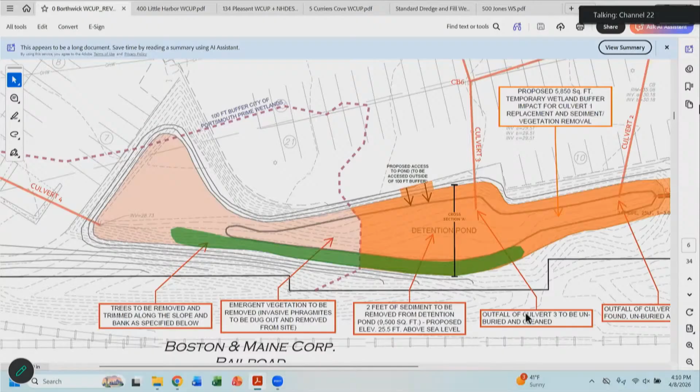The area in green is where the pond has been maintained to some degree on the parking lot side, but that green area has some trees that have grown up on the slopes. Generally, you don't like to see that on the slopes of a pond. So we've gone through that green area and identified trees. A fair amount of them are in pretty poor condition, dying, like the quaking aspen, and they're just dropping into the pond. So we want to be preventative and go through.

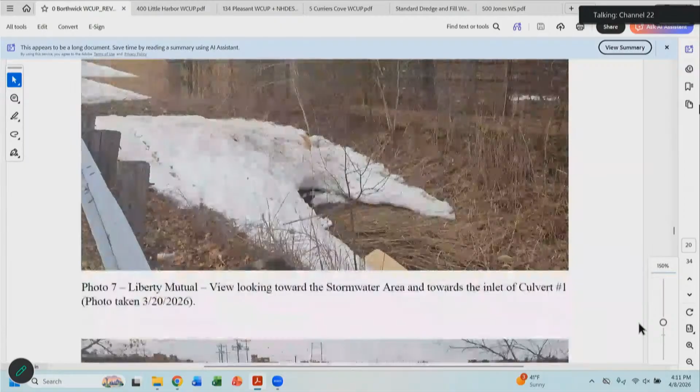Those are some good photos, that's the inlet area. That one's good too, it shows the trees well. They're not very mature, but they're several years old, maybe 10 to 15 years for some of them. So we're proposing to cut a few of those trees out to clear up that area, where the stormwater area narrows down in that photo.

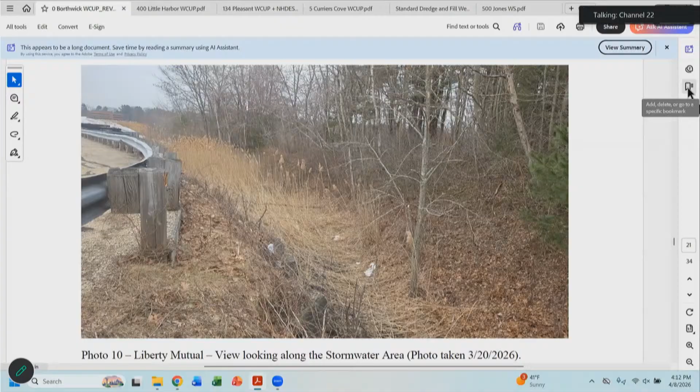We've come up with a list of those trees that we've provided, I think it's 11 trees we're proposing to cut as part of this maintenance of the stormwater area. DES typically recommends removing trees along stormwater areas. The list is on the bottom there for everyone to see.

We've got 3 red maples, 2 white pines, and the quaking aspens, which are a successional species that come in adjacent to water bodies. Those probably don't root very well on a slope and are falling down and dying at this point, so we're proposing those be removed as part of this project. That's mainly the majority of it.

We did update our impact areas, so some of the area is outside the 100-foot buffer. It's hard to tell what color the dashed line is, but the purple is the 100-foot buffer line. Right there, that other area is outside the 100.

But we're still working to get a contractor to do the work, so we'll develop a scope based on the approvals. Access will be down one of the slopes, we have a couple of areas to figure out how they'll get into the pond. That's the majority of it.

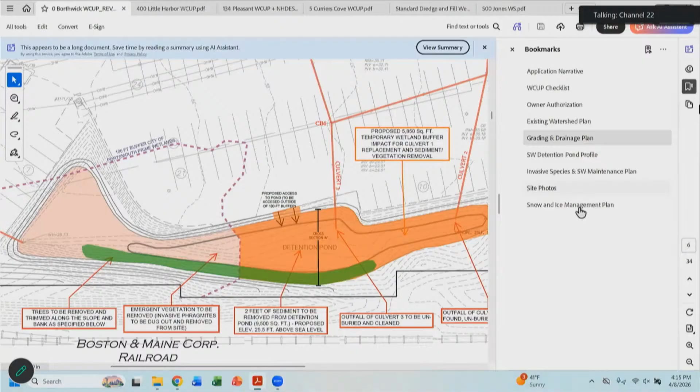Liberty Mutual prepared a snow and ice management plan, and this is their standard protocol on snow and ice. If there are any questions or concerns on this, we can bring it to Liberty Mutual to address any of the items on that plan.

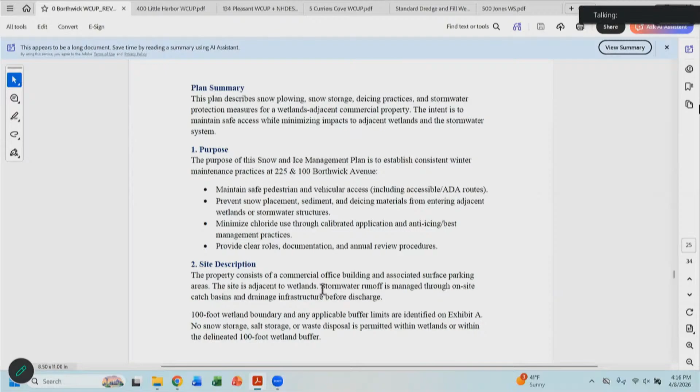So those are the main items. I know the commission wanted certainly the snow and ice management plan, invasive species, and then we have more of a stormwater management plan. So those are the main items that we think we needed to address from last meeting. So if there's any questions, we'll certainly answer those.

Great, yeah, thank you. Go ahead, Jess. Just on the monitoring plan, I understand that you will be out there annually to check, but will the applicant do any additional monitoring just to clear debris within that year time frame?

Certainly we could check on that. I think that would make sense. And certainly we could check with Liberty Mutual on that. I know they have contractors that are responsible. I'm just not 100% sure, so we can certainly check on that. Okay, I think that would be a recommendation I would have. It seems smart to kind of get ahead of it before it becomes an issue. Sure, yep, understood.

I have a question. With the 11 trees that are being cut, is there any opportunity on the property to plant in kind, or 11 trees of a better, whatever species would be appropriate?

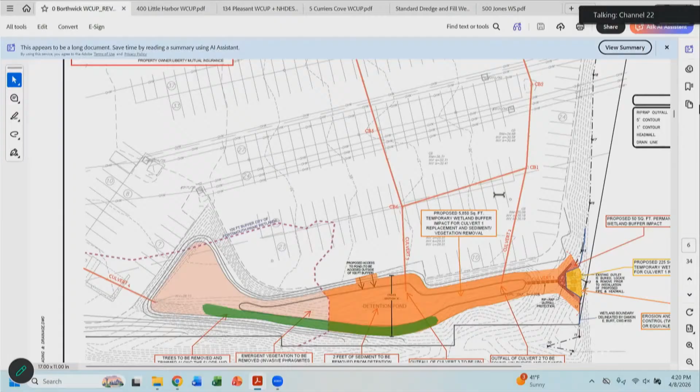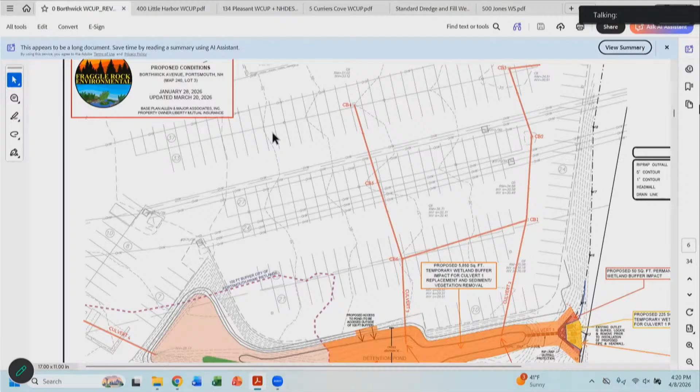But so I would think that there's opportunity to do some plantings. And if there is a tree restriction, we could certainly do some shrubs. I don't see why they would be opposed to that. That doesn't strike me as anything that would seem relatively minor in my perspective, but I would have to check with Liberty Mutual, but I don't think it would be an issue.

Certainly replacing the 11 with something similar, a shrub or tree, whatever's appropriate.

In the maintenance of the parking lot, they would just pick where it would make the most sense, since nothing's happened out there with regards to the parking lot yet. Right now you'll see they're storing some railroad stuff out there, railroad timbers. I don't really know the relationship of that or how it works, just an observation. The parking lot, in my mind, doesn't get a lot of use. I think it sort of looks like an overflow parking lot at this point, but the future may be something different that I'm unaware of right now.

So I think the plantings would make sense, and certainly we'll check on that for sure.

Just to reiterate, the plantings will also help with the stormwater situation too, since it'll help evaporate off some of that water. Correct. And I guess I was also curious, like this pond that's there, this detention pond...

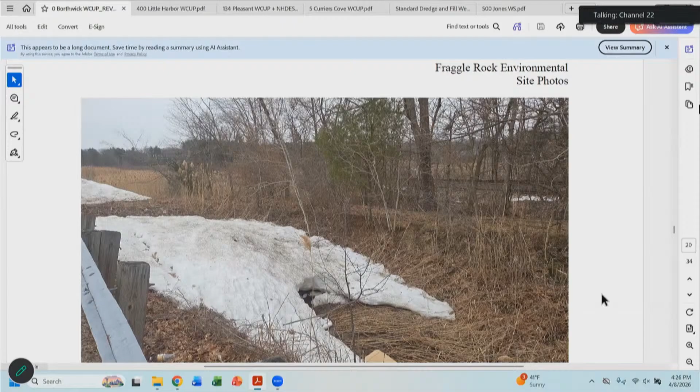The ones to the left really won't be cut, it's only a few on the actual slope. So we won't be on that slope part behind there, no. Maybe that pine right there might be cut, that one, but the bigger trees behind we're not touching at all. Those are really oaks, more developed, larger, almost 2-foot caliper. Those are basically quaking aspen on the slope we're looking at. It was hard to get a great photo, but those are into the slope. The better trees, like oak and well-established along that corridor, we won't be touching.

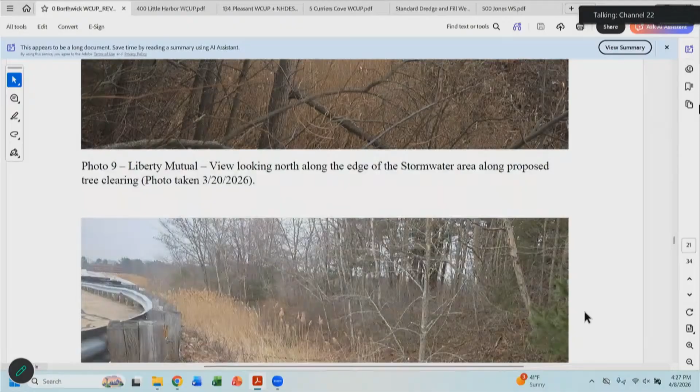I just had one other question. Last time I think you talked about salt storage there. Yes, on the snow and ice management plan it talks about how to do it, and I think there should be a figure that shows where it is. That's the salt storage, you see that in blue.

That's like that canopy area, and that's outside the buffer, even though it's close to the stormwater area. It's outside the 100-foot buffer. That's what they're currently using it as. I was just wondering if that's what they were doing now too. That is what they're doing, yeah. And where the red is, I don't know why you can't see in that building, there's like a storage office building, kind of their management or maintenance headquarters maybe, or something. I'm not sure, but the equipment's in that area.

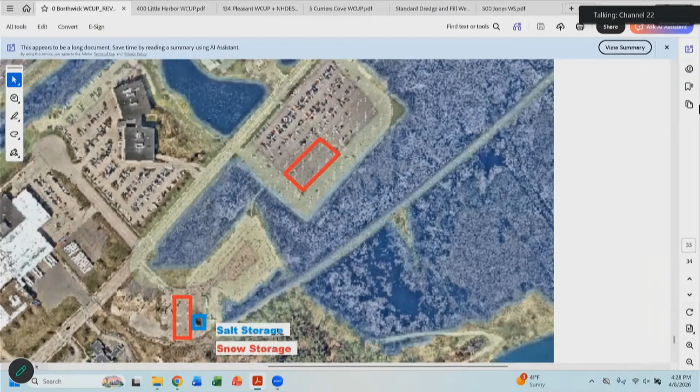That's kind of a funny photo, to be honest, for them to use, because it's a little deceiving, that photo or the image they used. But they've put it as far away on that parking lot as they can, relatively, outside the buffer, even though it's close to the stormwater area. Yeah, they have good BMPs anyway. They should be following the BMPs, and they have record keeping on the salts, when they did it, all that. We have not been involved in the winter monitoring, but that's something they're following in this plan.

Thank you, yeah, it's a good question. Any other questions? Are we ready for a motion?

Is there anything in the staff memo, Kate, that you need to address? I can't remember, good question. In the staff memo, I think last time we met we talked about getting a stamp on there. I think on the hard copy file that you delivered, you had the stamp. If we could just get a scanned version of that page, that would be perfect for our files.

It seems to be a thing with a lot of people, they'll do the hard copy stamp but the digital, you're like, oh, we'll get to that, and then you gotta scan it. It's a pain. Yeah, exactly, 100%. Just the one page would be great.

Sure, we'll do that. And we talked about trees. I think our second stipulation was a rollover from the first time we saw you, which came directly from the Department of Public Works. They wanted to see that maintenance plan and make sure they're committing to annual and long-term stuff. I think the first half of that stipulation doesn't really apply anymore because you provided a maintenance plan that looks at annual stuff. I think the second half is what we wanted to make sure gets included with this motion: that this maintenance plan shall be entered into the chain of title for the property in a recorded document approved by the planning and legal departments and recorded at the Rockingham County Registry of Deeds.

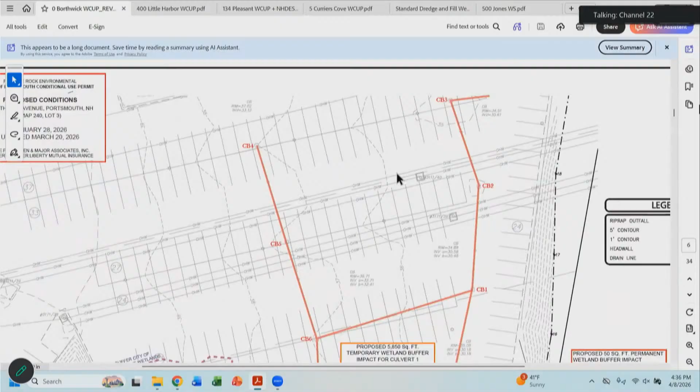Do you want the far side, like that top side boundaries? Do you mean like the prime wetland side, like this side? Yeah, well actually the top, because the wetland actually comes into the top, and I don't know if it shows 100% on that plan because it's sort of outside. The next plan above, I think, is the overview plan.

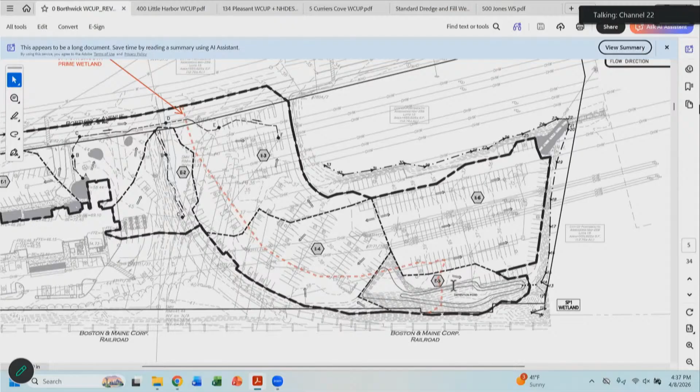Let's see. Yeah, so right up in that area too is the wetland - obviously comes on that side too. You want us just to focus on all the wetland lines that are basically shown on this plan? The northern - I think maybe just the area that you're going to be working in. Okay, and the guardrail that is right adjacent to that area.

Okay, yep, I just wanted to clarify while we're all here, 'cause I may be thinking later, what was I supposed to do? So, okay, no, that's fine. If everyone's okay with that - okay, are we ready for a vote?

I was just going to add one thing. It's not really as relevant in this case, but this project does seem to meet all of the criteria for approval, the 6 criteria. Good job, Barbara. Trying to remember. Great.

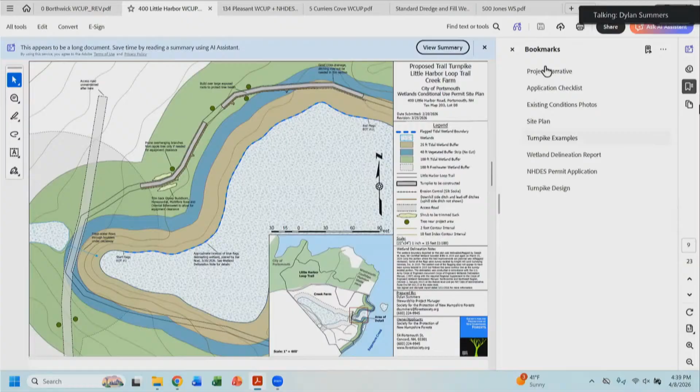I think it was very helpful to be able to look at the site after the March meeting. Once again, we are looking to do a trail maintenance project on the Little Harbor Loop Trail at our conservation property, Creek Farm. We're addressing an area of consistent wet and muddy trail where decades of use has caused the trail surface to compact and become subgrade, which traps water and makes drainage and the wet trail difficult in that area.

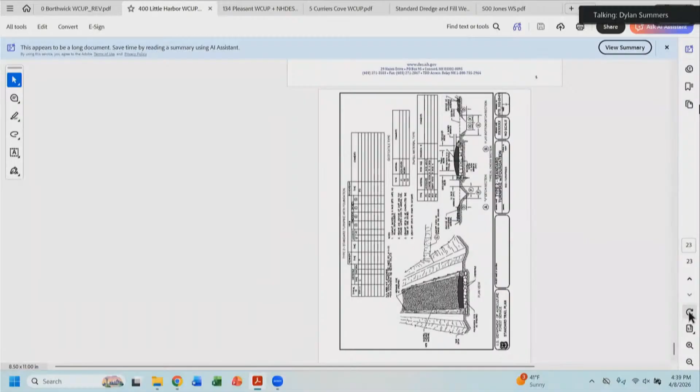We plan on building what is called a turnpike. It's a trail structure that uses fill to raise the trail surface above the water table, which assists in keeping the trail surface dry while also improving drainage in the site by breaking up the compacted surface and installing some subgrade drainage stone that'll help improve drainage in the site.

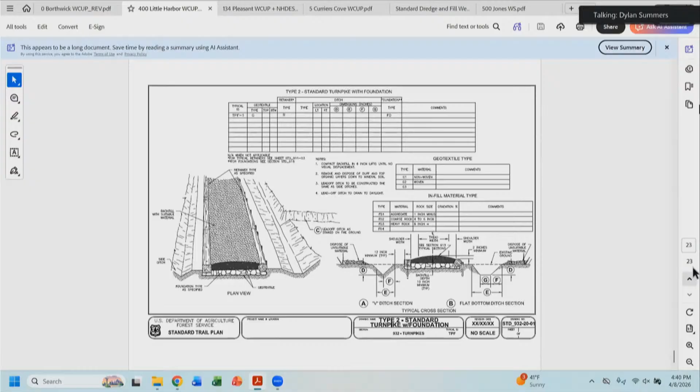We plan on doing a modified version of what is shown here in this plan, the U.S. Forest Service Standard Trail Plan, where we won't be building the structure up high enough to require us to use retainers. In this plan, it shows timber and log retainers, though we shouldn't need retainers. There will be some amount of subgrade or subground fill above the existing ground, and then the rest of the fill will bring the surface of the trail up to a more natural, original grade, sort of flush and connected with the surrounding ground.

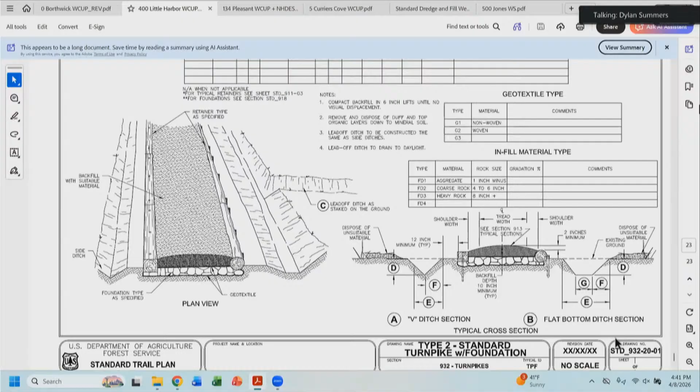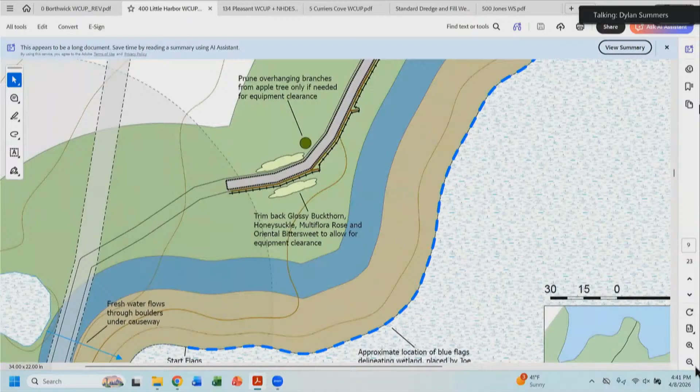We will include, if we need to, lead off ditches and drainage, though many areas of the site have good cross drainage and won't require that. But certain areas where the trail surface is far enough subgrade, we might provide for relief drainage to get water, have extra areas that water can get off the trail and allow it to infiltrate into the ground.

Our whole project is inside of the wetland, 100-foot wetland buffer. We shouldn't need to clear any vegetation except for trimming back some areas of invasives that are encroaching on the trail corridor, which we'll trim back to allow for equipment clearance. Besides that, our project is entirely within the existing trail and won't require any clearing of vegetation.

We will try to protect vegetation where we can, especially roots that are in the existing trail. Those we can build over without cutting so that we can protect the tree health of the trees that are along the trail.

We will install silt fence or silt socks along the whole length of the project area as erosion control during the duration of the project, so that there's no spillage or movement of the fill that we're bringing in. It's a pretty low slope area, so it's not a huge concern, but we'll make sure to have that.

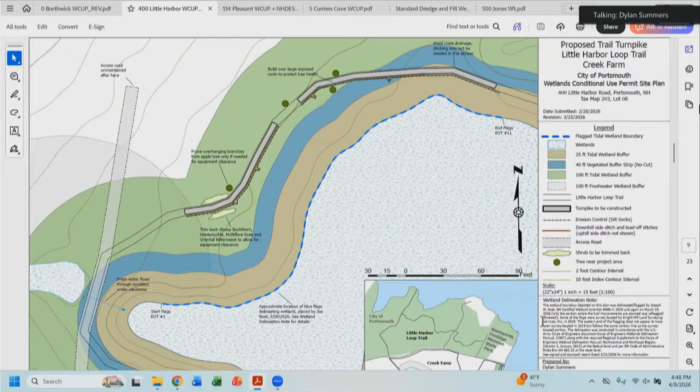The commission requested us to add the 25-foot buffer to our site plan, which I have done. We also requested having the plan stamped by the wetland scientist who originally did the delineation for a different project in 2019. Joseph Noel delineated this site, and we had Joseph back. He was able to check the delineation and confirm that nothing has changed, as well as flag the highest observable tide line along the section of trail we'll be working in. He provided a separate report, stamped and signed, which is attached to the application.

I don't think I have any other things to add to that at this time, but please let me know if I missed something.

Great, thank you. Questions from the commissioners?

Go ahead, Alice. I was wondering if you could talk to us about the overall width of this installation. I was looking at the cross section, and your narrative said it was 3 feet, but could you orient us a little bit as to how that compares to the Mount Major photo, for example. What exactly are we talking about?

Originally when I was thinking about this project, as I talked to our contractors we're looking at this project with, we've changed parameters somewhat. If we had used retaining rock like in that photo, the width of the trail surface would be 3 feet plus the room for retainment. But because we've decided that's not really required at this site and isn't really appropriate, it could actually cause more problems than it would solve.

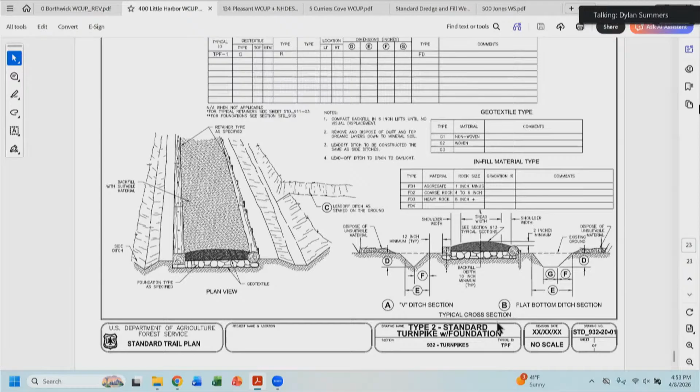Hikers and walkers will go around mud and walk along the edge of muddy areas, and over time that makes the problem worse, where the sections they're walking on now are also becoming muddy, so they go even further, and the trail expands. I've seen trails get up to 15 feet wide when they should be a relatively narrow path.

You can see in this photo good examples of a compacted area on the right side of the trail. In photo 2, you can see there's a compacted area just uphill from those spots of mud. That's an example of where people are hiking around the mud rather than staying in the trail corridor.

So overall, if anything, we will be restoring the width of the trail corridor and not expanding it. It won't look much like what I showed in the photo from Mount Major. The only reason that one is so wide is because it's an extraordinarily high use trail.

One of the most popular trails in the state, certainly one of the most popular in the Lakes region, sees about 80,000 people a year. The existing trail corridor was an old road, so we had to essentially work with the whole area because of how eroded it was. We had no choice but to restore that whole width, and it's appropriate for that site, as there's frequent two-way traffic, especially in the summertime.

This trail is very different, still high use, but not on that level. So we will be keeping the trail at the existing width, and trying, where it's become really wide, to restore areas to make it a more consistent width, and restore areas that have been impacted by people avoiding the mud.

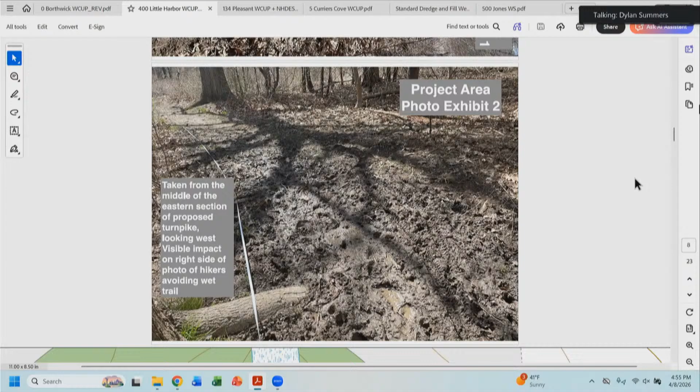I had a follow-up a little bit to that, just to clarify, because I was thinking the same question, but you do have in your narrative that your planned turnpike would be 4 to 5 feet wide with a 36-inch finished walking surface. So that feels like you wouldn't be going more than 5 feet with the whole trail.

Absolutely. Yeah, so it's good that it's written in there. If that's what your intent is, that sounds good.

Yeah, and the existing trail is about 5 to 6 feet, except in certain areas which have gotten to where the impact I was referring to earlier, where they've gotten to 8, 9, and maybe as much as 10 feet in one spot on the trail.

I just wanted to clarify on the roots that you mentioned today, and when we were on the site, that you wouldn't need to be digging up roots. You might have to do a little bit of work, and I didn't see that in the narrative, but I might have missed it. I might have forgotten to add that to the narrative. I do make a note of it on the site plan, pointing out the trees that have the most exposed roots, and that where we'd be building, we'd be going over those roots rather than taking them out.

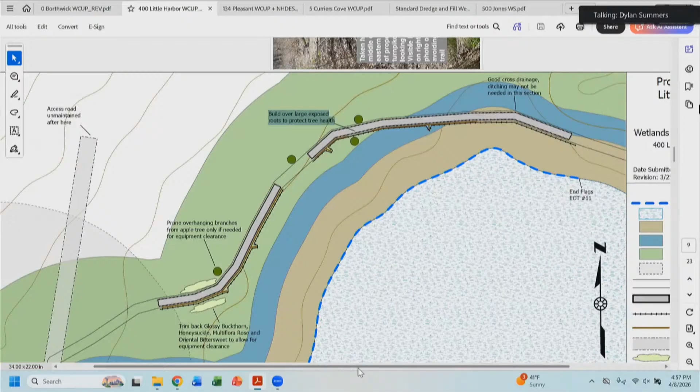So that area pointed out in the site plan is where there are the most roots. There are other areas with exposed roots along this section, kind of the second area of Turnpike. But those will generally be, we will build over pretty much all of the roots. I didn't see any roots that felt like this is not really workable and we would need to take this out.

I think my biggest takeaway was, at the site visit, was just that this will be effectively re-narrowing the trail, which I'm really excited about.

Dylan, my question is, do you anticipate planting in those areas that'll be revegetated, or will you plan to have it do so naturally? I think we plan to have it do it naturally.

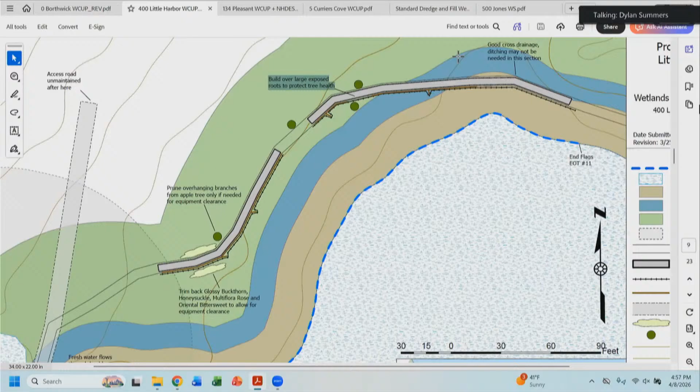I don't want to necessarily change the character of the existing trail by introducing plantings that would feel more artificial, feel more like they were purpose built. I think the advantage of letting things happen naturally is that it will be easier to maintain. We don't have to maintain planted shrubs that might require more care, as well as it will happen more organically and in a more naturally feeling way, rather than having plantings that were introduced in a manner that feels more human driven than natural.

Particularly in the areas that have gotten the widest, which are a little further along in the trail, and areas that are more forested, the natural ground is more like leaf litter. So if you put in a shrub and maintained it, it's going to feel less part of the forest than if you just recover that ground in leaf litter and allow plants to grow naturally in that zone.

So in order to do that, the nearest point of connection is on the southerly side of the Parrott Avenue parking lot, and on the opposite side of Parrott Avenue is the South Mill Pond, which has a salt marsh edge. This catch basin is within 75 feet of that salt marsh edge. So where we had initially come in with a minimum impact expedited application, we cannot do that because of the 75-foot closeness, so we're changing it to a regular wetland application.

I don't think that would change your deliberations or recommendations, but it means we'll just be filing that with the clerk, and there wouldn't be a conservation signature for that particular application type. But what I was getting at earlier was that the site currently accesses the Parrott Avenue parking lot, and we believe that site does have rights to that access, but some issues have been brought up by the city that that might not be the case in their opinion.

So the design team redesigned the 134 Pleasant Street site to terminate in a turnaround, so traffic will come in and out of Pleasant Street and not access city property whatsoever. What that means is, in the handout you have, if you look at the top left portion of the impact, the impact is reduced because all we need to do is adjust the curbing at the edge of the two properties and provide a fire department crash gate for emergency access in that existing opening.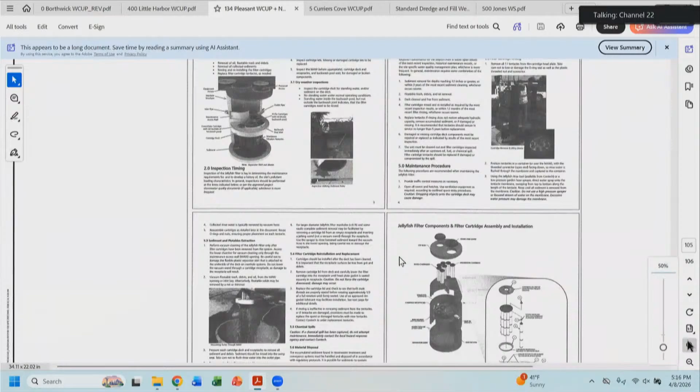Is anything happening to the planting island kind of towards the end of where you're working? If you scroll down, I think you're talking about what was a planting area over here. There was, in the design, but in the package you have before you today, we've moved that planting area, shifted it a little bit to the east. There's still a planting area there. I'm talking about the farthest south area, where it looks like there's a line of trees, and I didn't know if it was disturbing any of that. No, the impacts go out a bit just because that's the way we draw the impacts, from the pipe. But they're going to be accessing the north side of that catch basin, so they shouldn't really need to even excavate in that island.

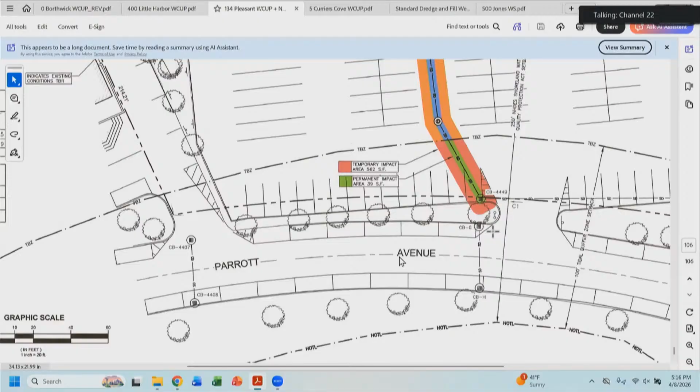That was my question. There's no intent to do anything to that island, except maybe incidentally. My other question - can you point out for everyone to see, there was a jellyfish filter that's going to be installed, is that correct? Yes. If you go up, I included some plans from the development site. This is good - so at the 134 Pleasant site, the roof drainage is going to connect into this drain line. The street and surface drainage will connect to a drain manhole that feeds that runoff into a jellyfish filter, then recombines with the other runoff before it exits the 134 Pleasant site and travels across city property.

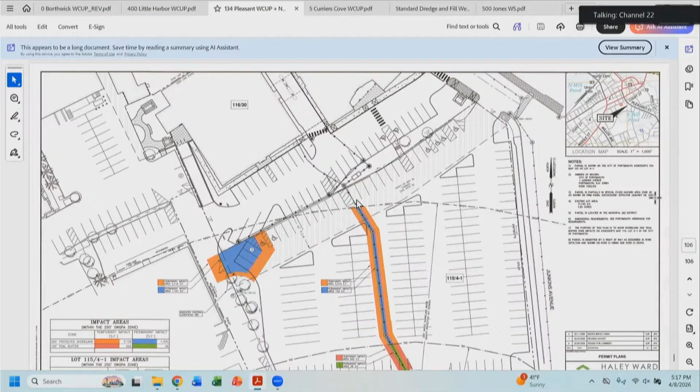So is only one section being run through the jellyfish filter? All of the surface drainage. The roof drainage is currently separated on the existing building, and it will maintain that separation - the new roof runoff from the new building being constructed between the existing building and Pleasant Street will also just travel through the building and be discharged that way. That meets the Portsmouth stormwater redevelopment criteria of 40% of the site having advanced treatment.

Got it, okay, thank you. And I think the other thing we figured out is that the municipal lot there is going to go now into a separated system, and that portion of the runoff isn't going to go through the jellyfish, so it isn't getting that treatment. Rather than going to the sewer system, it's now going out the stormwater outfall into Mill Pond. So it's worth noting that it is increasing a little bit of runoff to the Mill Pond, even though the whole project has a net benefit.

Right, and I looked for that outfall after our site walk. I went back and I think it runs down Junkins Avenue and goes into the culvert under the street, because there are no outfalls in that vicinity, so it must run down. There's two arch culverts that connect to the Mill Pond, and I think it must dump into that culvert under the road, into the lower part of the Mill Pond. When they built Junkins Avenue across the pond, they put in some arch culverts, but there's no outfall from that drainage system visible on the shore. So the pipes do go into the road, and I think they go down the road and tie in. So you had asked about erosion at the outfall, and I think it won't be a problem because it's going into that box culvert.

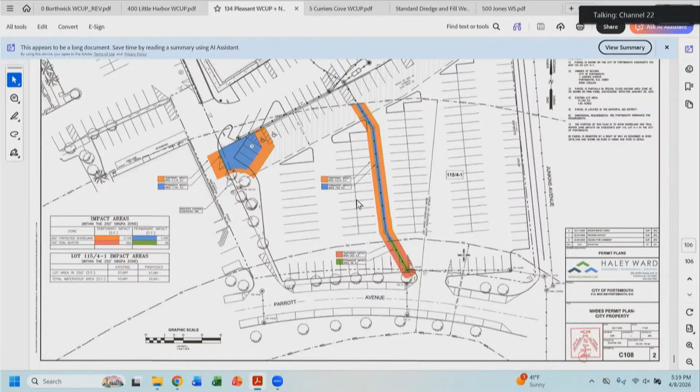Yeah, I'm not perfectly fluent in all the terminology, but the outlet is big, you're saying it's a box culvert, concrete, is that right? Yeah, it's a concrete culvert. Okay, so it's not like dripping onto the shore, it's further out into the water, in a structure that's already stable, as opposed to dumping onto the shore, which could be unstable if there was more runoff. Okay, that's helpful to know.

The Mill Pond stormwater stuff is like an interesting story, right? There are so many mysteries. It's gotten so much better since I was a kid.

Yeah, it's miles above the old days when it used to have to be drained, and you knew when it was drained, right, it had that very distinct smell during periods of time. So part of this is taking out any remaining stormwater connections. They used to, when it rained heavy, have overflows from the sewer system into the pond, and this further reduces that probability, so it's a pretty good project environmentally in that regard.

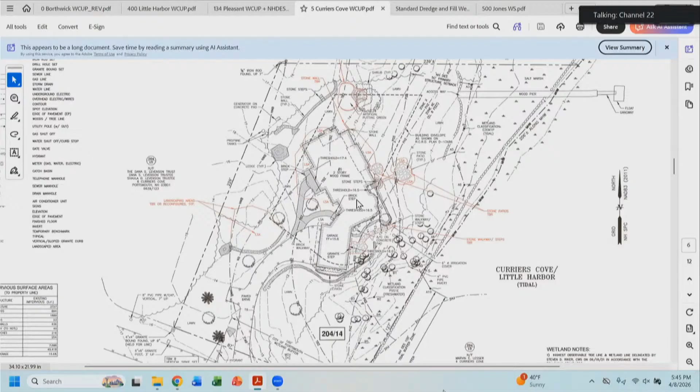But going back to the initial submission, Kate, the next page is an existing conditions and demolition plan. We're removing some hard surfaces that are within the 50-foot and 100-foot line.

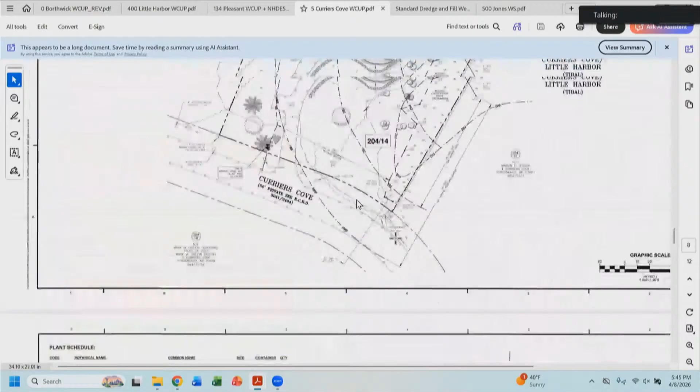Next plan shows—I think that's two plans down. I'm not... this should be a site plan. Yeah, sorry, I'm sorry, this is the site plan, my mistake. So the site plan shows the red as hard surfaces that are going to be removed, and it shows the construction of a deck on the shore side of the existing home.

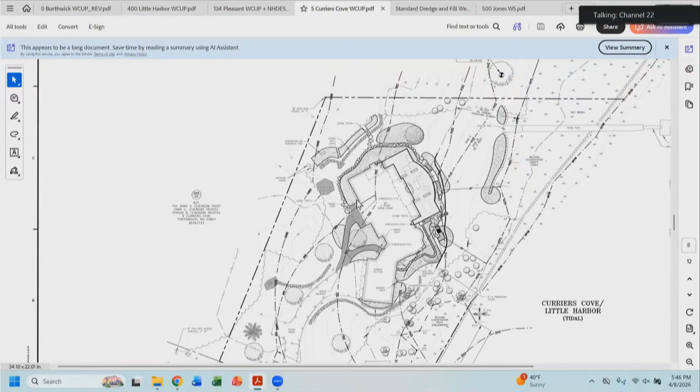So the project is a deck addition to provide some outdoor space that is not directly attached to the shore surface. The next sheet in the initial submission is a landscape plan, or there's a grading plan, some minor grading just to raise the grade, as we talked about on the site walk. I think most of you were there. And then there's a landscape plan developed by the Knickerbocker Group, a full complement of shore and other plantings even outside of the 100-foot.

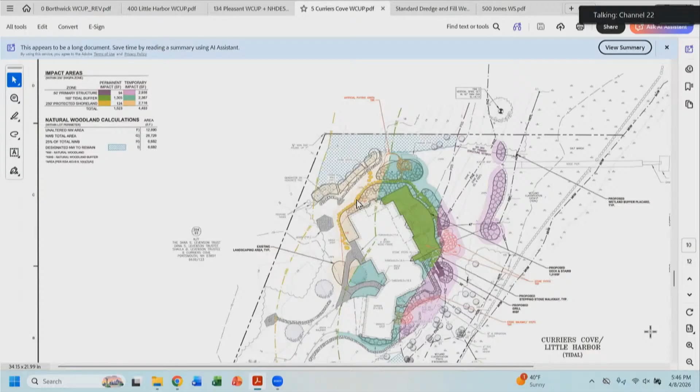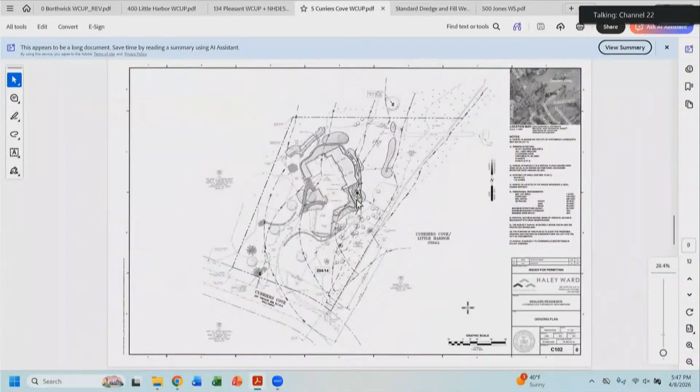And then the next plan is our DES permit plan with impacts. Keegan will go over—I think we included planting impacts as impacts on this plan, but they really aren't, because you can plant in the tidal buffer zone to your heart's content. And then there's a detail sheet. With that, I will turn it over to Keegan, and he's going to go through, not in exact order of your 1 through 6 comments, but in general, he's got a submission and he talks about the living shoreline and other things. Thank you.

Hi folks, so yeah, just in response to the memo that we had received.

Can you state your name for the record? My name's Keegan Furo. I work for Haley Ward as a permitting specialist, and I've been working on the DES applications for this deck construction project.

So in response to the memo we received, I believe late last week or early this week, I provided a document breaking down the current plans of the project and how they apply to the different criteria for approval. I'm going to read through some of my responses to your comments, and I'll make sure to reference what your comments were.

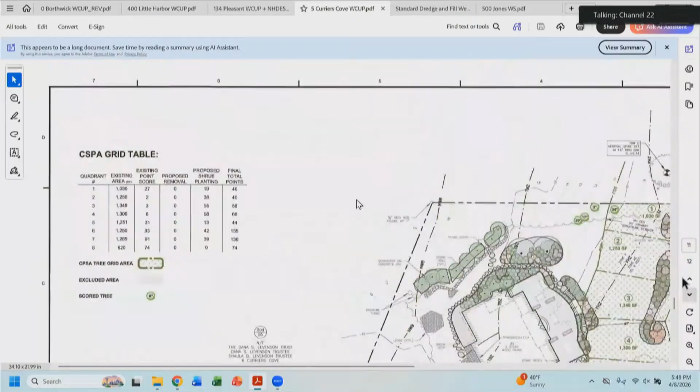Starting with the first comment: the land is almost entirely located within the tidal buffer zone, and there is a very sensitive high marsh habitat below the highest observable tide line of the applicant's property. It was discussed that a living shoreline strategy would help mitigate impacts from construction and long-term impacts from increased impervious area within the shoreline zone. One comment was that the application is missing a living shoreline strategy pursuant to section 10.1017.26. I think the intent of the shoreline planting was to duly serve as a living shoreline buffer.

All that material is woody shrub material, planted with consideration of the increased impervious area. We're not proposing to plant grasses or ferns in that area. We wanted something to bolster the shoreline and also to tie into the existing forested and scrub shrub upland riparian area. In the plan set you now have, on the planting plan, you can see what sorts of vegetation is proposed in those areas.

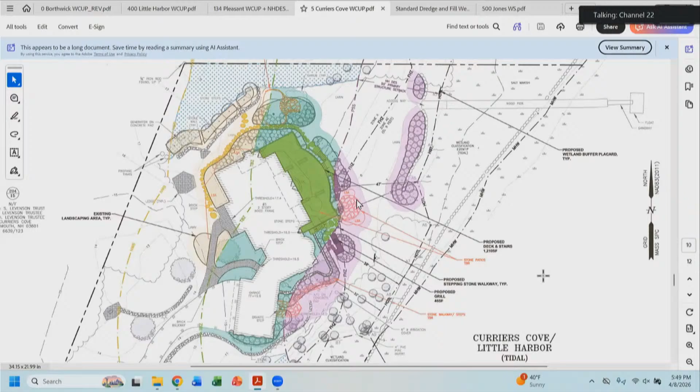Second comment: it was noted that a wetland buffer enhancement plan should include long-term maintenance plans. In the plan set you've been provided, we have added a long-term maintenance plan to sheet C103, prepared by the Knickerbocker group.

Essentially, it includes monitoring the vegetation throughout the first 1 to 3 years to ensure there's an 85% survival of the planted vegetation, or at least to an extent that would meet the minimum DES shoreland point score requirements, whichever is more. There's also information about how it will be maintained in terms of invasive species, and how fertilizers and pesticides will be prohibited within the buffer.

Third comment: the application has not provided any alternatives at this stage. There's an alternatives analysis provided in the NHDES wetlands application on pages 21 through 22. I don't believe that's included in the packet you received today, but it's within the NHDES application uploaded to the portal. We did talk about alternative locations for the deck, alternative sizings, whether or not the deck was actually needed, and other avoidance and minimization measures.

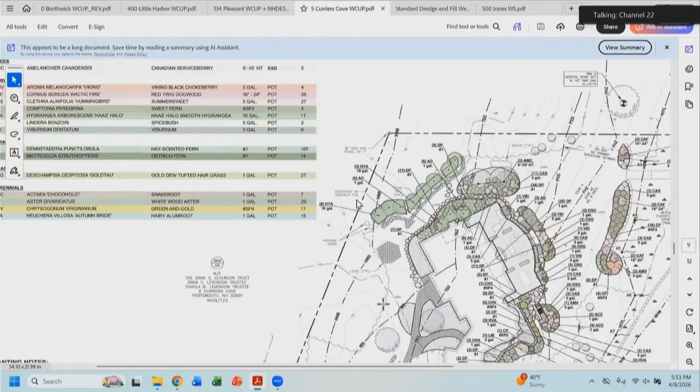Just to follow up on the living shoreline discussion - a lot of the applications you see dealing with erosion at the shore raise questions about proper treatment, whether hard armoring is appropriate or not. But as Keegan did mention, this property abuts a significant stretch of well-vegetated marsh area that goes off to that erodible shore. So it's sort of already a living shoreline - a very stable area. The other thing to consider is that this is not an area that sees direct hit storm wave action. I thought Keegan was going to mention that, but I think it's worth noting that it kind of is a living shoreline already.

Questions from the commissioners? Maybe just picking up on the living shoreline comment - I'm curious, Kate, do you want to elaborate on what kind of information you felt was missing?

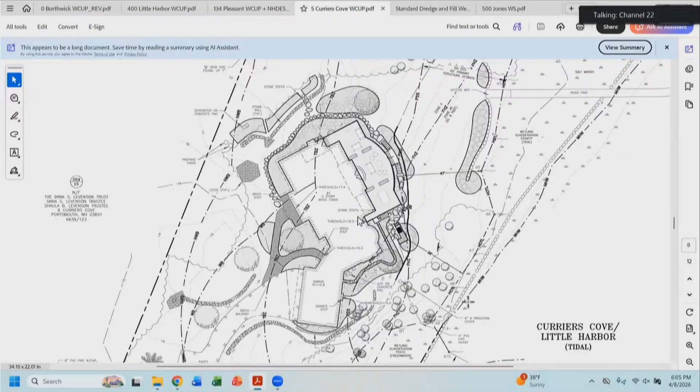Okay, and then as a follow-up, which is probably going to get a similar answer, is the stairs. You have two large stairways cascading off both sides. Is there any talk of doing one of the stairways instead, or changing that layout a little bit? Potentially, yeah, we could chat with the client about that.

The thought with the two stairways was to give better access to the lawn, particularly with where the stair is currently. If it were to go straight out, the number of risers required would project further towards the resource. So the idea to go down a couple steps to a landing, then split left and right, helped us better keep the stair tighter to the deck, to again not protrude closer to the resource.

There's also the grill area stair, to have access directly to the grill, coming out of the kitchen to go grill and then bring the food back up to the house or to the deck. My other thought is to move the grill area up to the north area if you can't do the deck, but that's going to screw up the whole kitchen setup.

Thank you, I have a follow-on to Barb's. I just want to make sure I understand—I didn't get to go on this one, I wasn't here. But I'm reading in the no action alternative, it says the main reason that's not acceptable is because the size of the patio is too small to accommodate guests. So I guess I'm wanting to better understand, or maybe I'm just pointing out, this is in a prime area.

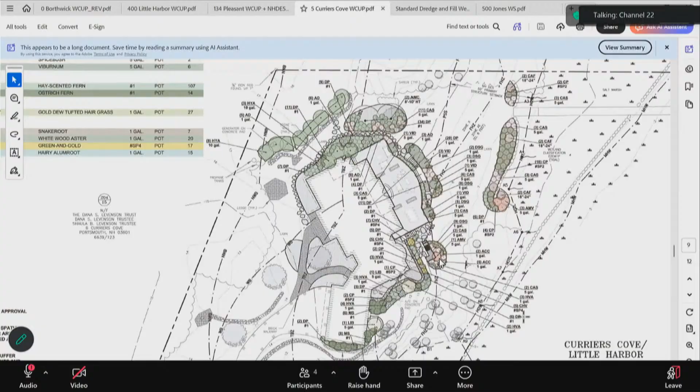Seeing no further questions, would someone like to make a motion, even if it's just to open up discussion amongst the commissioners?

Yeah, I can make a motion to recommend the 5 Curriers Cove wetland conditional use permit so that we can have a discussion about any needed stipulations. So recommend approval, I mean, I think that's what we have to do, right? Okay, do whatever you want. Do we have a second to that, and then we can discuss amongst ourselves? I'll second.

Do you want to start, Lynn, because you made the motion? You don't have to, sorry, put you on the spot, but I can also start.

I mean, I see the staff memo is encouraging us to postpone and try to get more detail. They did provide quite a bit more detail here for us. I feel like they've really gone over the top in terms of giving us a lot of detail. We approve projects that have a lot less detail, but that also means we can really dig into the details.

I'll also share that looking at those predicted marsh migration areas, by 2050 at a very modest level of sea level rise, marsh is predicted to extend all the way up to that patio that's proposed to be removed, just as a point of reference on these diagrams. So that's on my mind, really protecting that wetland resource, and one thing I'd ask for is a much larger zone of restored marsh, or pushing back that mow line basically.

The deck is elevated, so that makes me feel a little better about it compared to other structures that might be put out there, like a full-on expansion of the home footprint, but that's just a bit of a gut feeling that may or may not be based on actual impact of a deck versus an addition.

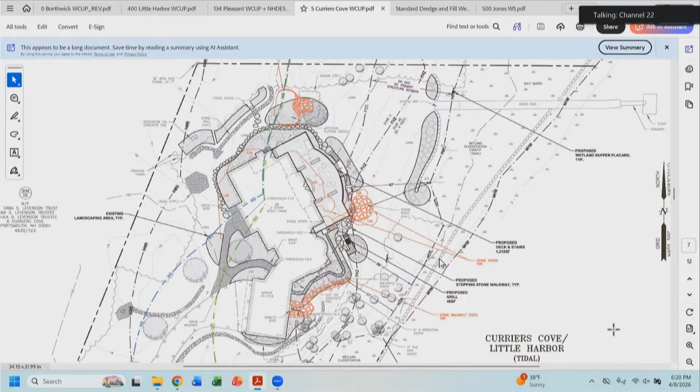For me, looking at the criteria for approval, number 6 in particular, which is that any area within the vegetative buffer strip will be returned to a natural state to the extent feasible, I think that would mean seeing that whole 25-foot no-cut buffer either not mowed or, as we were talking about, filling it in more with salt-tolerant grass species would be awesome.

In addition, I understand that this is kind of the location the deck needs to be based on where the kitchen is and the issues you cited over on the northern side of the house with the bedrock and outcroppings. Yep.

However, a little bit to Brian's point, we need this size deck to accommodate guests. I think the original patio and walkways combined was like 780 square feet. Now this deck is like 1,200 square feet with the stairs. I think there's somewhere in the middle that could be met that would not increase the impervious surface by 500 feet in the 100-foot buffer.